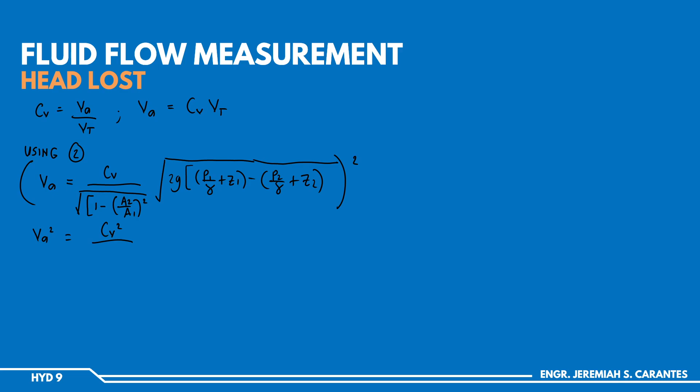And to do that, we will square this equation. And if we do that, magiging VA squared ulit siya equal to, syempre square mo lahat yan, yan ay magiging CV squared. Square mo si square root, mawawala si square root. 1 minus A2 over A1 squared. Square mo si square root, mawawala din si square root dito. So ito nakamultiply na lang siya kay 2G, P1 over gamma plus Z1 minus P2 over gamma plus Z2.

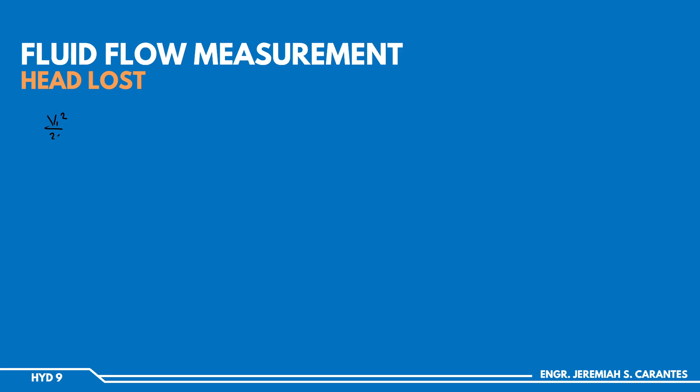We have V1 squared over 2G plus P1 over gamma plus Z1 equal to V2 squared over 2G plus P2 over gamma plus Z2. So, let's say ang itsura ng ating system ay ganito. So, nandito yung ating discharge. Ito yung ating tank. So, orifice discharging from a tank.

So, ang point 1 natin dito ay liquid surface ng tank. Ang point 2 natin dito sa mismong opening ng orifice. So, considering this energy equation na walang head loss, take note si point 1 siya ay yung water surface mismo dun sa tank. So, kapag sobrang laki ng area, ang velocity ay approximately 0. So, V1 is 0. Since si P1 exposed na sa atmosphere, 0 na din siya.

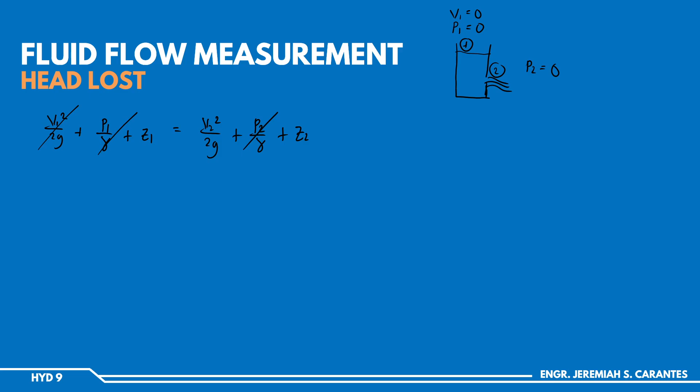Same with the P2. Si P2 kasi just after the opening, saktong labas lang. Ibig sabihin, exposed na rin sa atmosphere. So, yung P2 natin dito ay 0. So, kung babalikan natin itong ating energy equation, mawawala na ito, ito, and then ito. Matitira na lang Z1, V2 squared over 2G, and Z2. Si Z2, ilipat ko na lang sa kabilang side. So, Z1 minus Z2 equal to V2 squared over 2G.

Now, itong Z1 minus Z2, that's basically the difference in head or difference in water level. So, let's express that in terms of H na lang, para ito ay equal na lang kay H equal to V2 squared over 2G. Now, if you want to get V2 here, cross multiply yung 2G. So, V2 squared is equal to 2GH. Square root lang para maging V2 is equal to square root of 2GH. So, yan na yung ating velocity sa mismong orifice.

Take note, since walang head loss, this is a theoretical value. If you want it to be an actual value, kailangan mo mag-multiply ng coefficient of velocity. So that's our V2. Now, alternatively, since V2 is equal to CV times the square root of 2GH, take note yung H dyan ay yung ating initial head kapag walang head loss. Pero kung merong head loss, kaya nga tinawag na head loss kasi yung head mo ay binabawasan.

So from this equation, if meron tayong HL, itong V2 natin, we can express it as CV square root of 2G, tapos yung H mo dyan, pwede mong palitan ng initial head minus head loss. However, since nag-consider na tayo ng head loss dyan, dapat mawawala na itong CV.